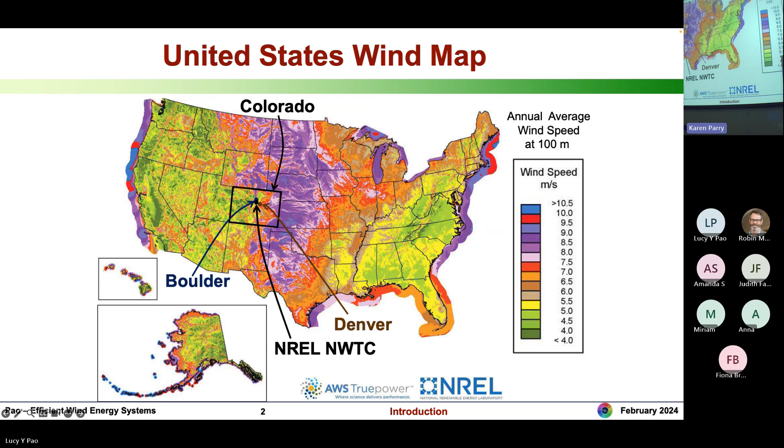What I thought I would do is first talk about where we are now in terms of installed wind power capacity worldwide, and then talk about a couple of projects, hopefully areas that can help wind energy develop further in coming years. My group has been involved in investigating 2-bladed and 3-bladed lightweight downwind turbines - I'll talk a little bit about that project. I'll also talk about floating wind turbines, the project that we've worked on there.

First, where are we now? So we're going to look at this decade from 2013 through 2022. Over this decade, worldwide, the average annual growth rate for installed wind power capacity is 12% per year. So at the end of 2022, there was 906 gigawatts of installed wind power worldwide.

Now, by country, which country has the most installed wind power? China, definitely, by far - China has about 40% of the world's installed wind power capacity. Now, what country is number two? It's not UK, it's not Germany - it's actually US.

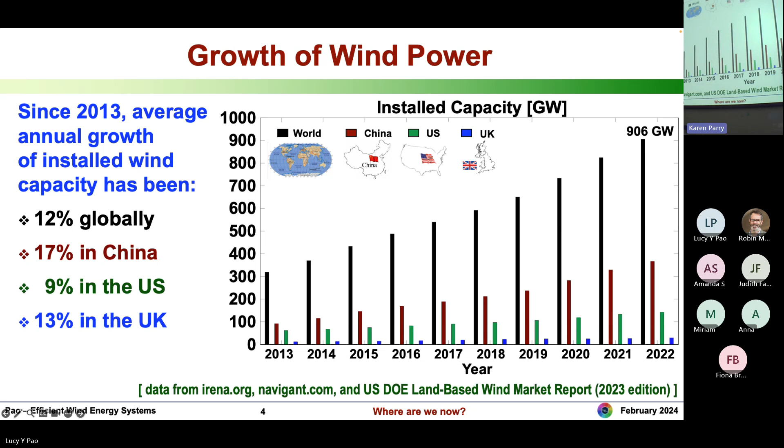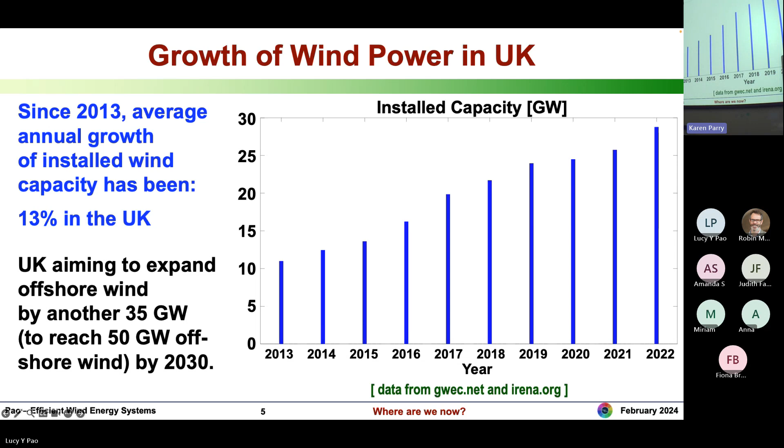This pie chart shows the top 10 countries in terms of installed wind power capacity, and there's quite a bit of installed wind power capacity in many other countries worldwide.

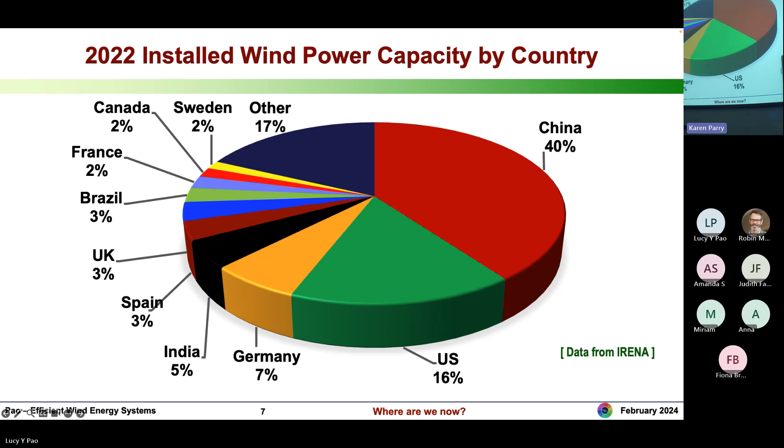Now, if you're a small country, comparing by wind power capacity maybe isn't so fair, so comparing by wind penetration might be a better measure. Wind penetration is what percent of a country's electrical energy needs is met by wind. In this regard, Denmark is by far the number 1 country—more than half of Denmark's electrical energy needs is met by wind. These are averages across 2022, and instantaneously, Denmark does at times reach 100% wind penetration, at which times they're trying to export a lot of that wind power to neighboring countries that can better use it.

China, for all its installed wind power capacity and very large population and electrical energy demand, is only at 9% wind energy penetration. The US has lower population, but unfortunately we're energy hogs, so we're only at 10% wind energy penetration.

The UK in 2022 is about 25% wind penetration—I understand it's about maybe 32% now. But the point is there's still a lot of room to grow. Solar penetration in general is behind wind penetration; it's catching up quickly and will surpass wind soon, but there's still a long way to go to get to 100% clean energy penetration.

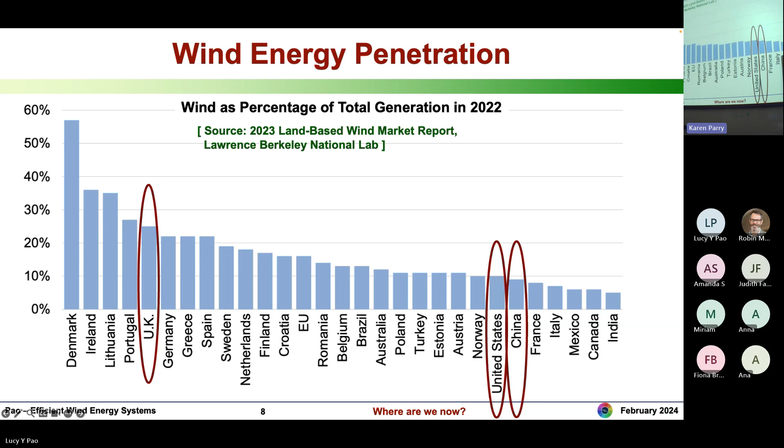So what are some of the things we've been studying in my group to hopefully push wind energy further? One area is looking at lightweight downwind rotors. Another area we've been looking at is floating wind. Let's first talk about the downwind lightweight rotor concept.

But before getting into that, let me briefly go over the main components of a wind turbine so we're all on the same page. This is a photograph of a 1.5 megawatt wind turbine at the NREL site just south of my campus—a traditional 3-bladed upwind turbine. The wind comes in from the left. There are 3 blades that come together at what's known as the hub. The hub together with the 3 blades is called the rotor, which is the rotational part of the turbine.

The rotor is mounted to the nacelle. The nacelle also houses the drivetrain and generator, and sits on top of the tower, which is secured into a foundation—for land-based turbines, a lot of concrete, meters deep and these days tens of meters across. I brought in a plastic model of the turbine just for fun, which we can pass around.

So the standard wind turbine is a three-bladed upwind turbine that faces into the wind, so the wind comes through the rotor first before going around the tower. If we turn it the other way, then it's a downwind rotor—the wind will go around the tower first before going through the rotor.

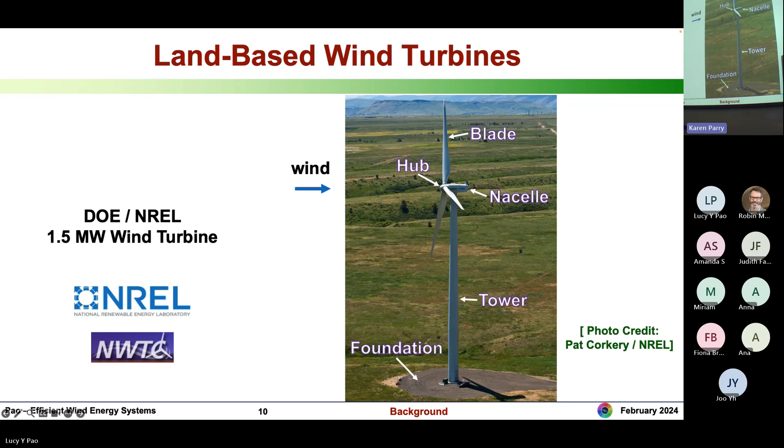Many people are familiar with wind turbines just getting larger and larger. Over the last 30 or so years, wind turbines have gone from about 100 feet at hub height with 90-foot rotor diameters, to now well above 300 feet at hub height and beyond 500 feet rotor diameters.

Now, for land-based turbines, we don't see more than about 5 or 6 megawatt turbines, largely due to transportation constraints on land—roads and railways really don't allow towers and blades for larger turbines to be transported. So the really large turbines are all for offshore wind.

For offshore wind, there are 13 megawatt and 14 megawatt turbines being built in large wind farms that are going to become operational this year.

There are 15 megawatt commercial wind turbines that you can order now. They will be ordered for newer wind farms that are being planned. And so we will get to the 17 megawatt turbine, I think, well before 2035 commercially.

When we see wind turbines, especially these large offshore turbines, typically we're looking at them from a distance, so it's sometimes hard to appreciate just how large they are. There's the silhouette of the Statue of Liberty, but in case you're not as familiar with that, I've also included an Airbus A380.

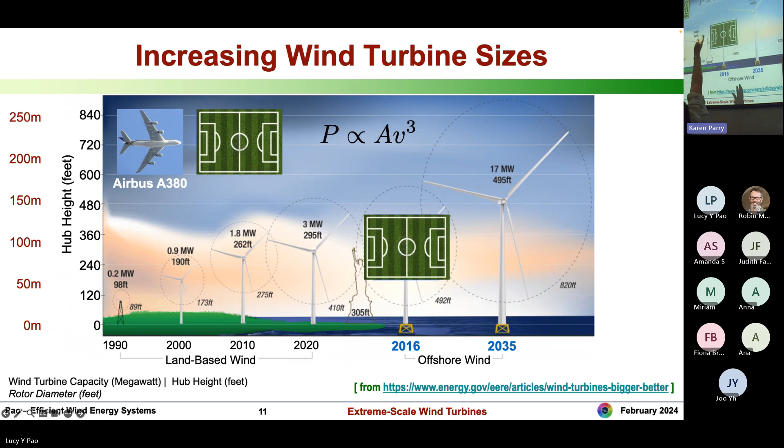Remember, we have 13, 14 megawatt turbines that are being built in large wind farms as we speak. So part of the economy of scale in going to larger wind turbines is that power is proportional to the cube of wind speed, and there's typically higher speeds as you get higher off the ground. Having taller towers allows us to access those higher speeds. Power is also proportional to the rotor swept area, and taller towers can also hold up much larger rotors.

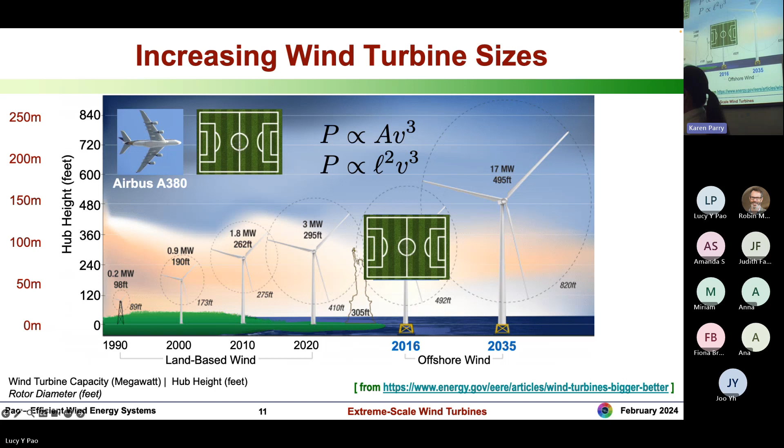The rotor swept area is proportional to the square of the length of the blades. So you really have, as you get to these larger turbines, this tremendous growth in the power that can be produced. That's one of the economies of scale that happens.

One of the projects that my team has been involved in is this project where we're exploring lightweight downwind rotors. We called our concept the segmented ultralight morphing rotor, or SUMR for short. I'll explain the terminology a little more in the next slide.

We're bio-inspired by palm trees, which are down here in the lower left. Palm trees on average are about 20 meters tall, so much smaller than everything else here. In this project, we designed a number of 13 megawatt, 25 megawatt, and 50 megawatt turbines. At the start of our project in 2016, the average land-based turbine was about 2.5 megawatts. Nowadays, the average land-based turbine is about 3.5 megawatts.

All of our 13 megawatt designs had blades longer than 100 meters, and all of our 50 megawatt designs had blades longer than 200 meters, so the rotor diameter is more than 400 meters. These are really, really large machines.

So why downwind? Well, when you have upwind turbines, the rotor is in front of the tower, so wind is coming through the rotor before going around the tower. The combination of centrifugal, gravitational, and thrust forces on average pushes the blades backwards. And as these blades get longer, they naturally get a little more flexible, and they're being pushed back more towards the tower.

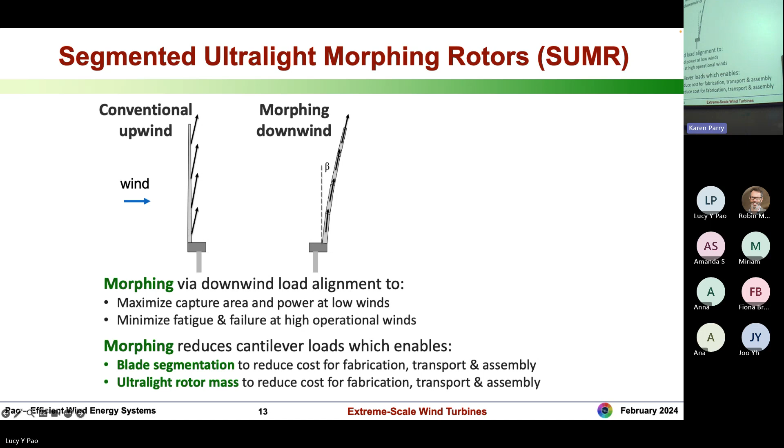So the idea is then you have these downwind, lightweight blades. They will naturally morph with the wind. When you have very light winds, the blades will be pretty much wide open, trying to maximize power production. As wind speeds increase, they'll morph with the wind and essentially try to align with the wind instead of fighting it. That will reduce the structural loads inside the blades and also will naturally regulate the power at those higher wind speeds. We're bio-inspired by palm trees, which do just that.

They morph with the wind, they're lightweight, they can survive these hurricane conditions, which is something of concern on the US East Coast in particular. This is in contrast here — this is an actual photo from a hurricane.

In the foreground here, there is a massive oak tree, which has actually been toppled over by the hurricane forces. That massive oak tree essentially is trying to be as rigid and massive as possible, fighting against the wind, but in the end, it got toppled over, whereas the palm trees, going with the flow, were able to survive the hurricane conditions. So that's kind of the inspiration for our SUMR design.

Now, one other aspect, the segmented part, is an aspect that our structural colleagues were investigating. Blades, for the most part, are manufactured in one piece these days. So as you get to these 100+ meter blades, it's very complicated to transport them. There are a number of teams investigating whether it might make sense to manufacture blades in segments. That certainly would simplify the transportation issues. But the big question is, when you get to the site and put them all back together, will that blade have the structural integrity to last the 20 or plus years that we want these blades to last? That's still the big question.

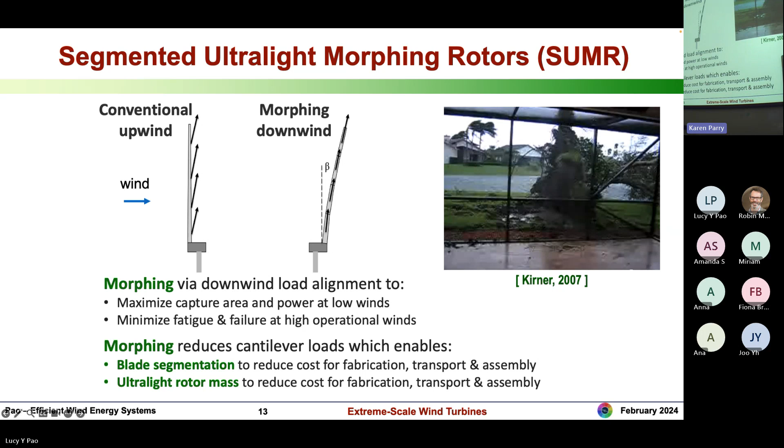Okay, so I'm not going to talk more about the segmentation part. That's not something that we in my group have directly worked on, but it is an active area of research.

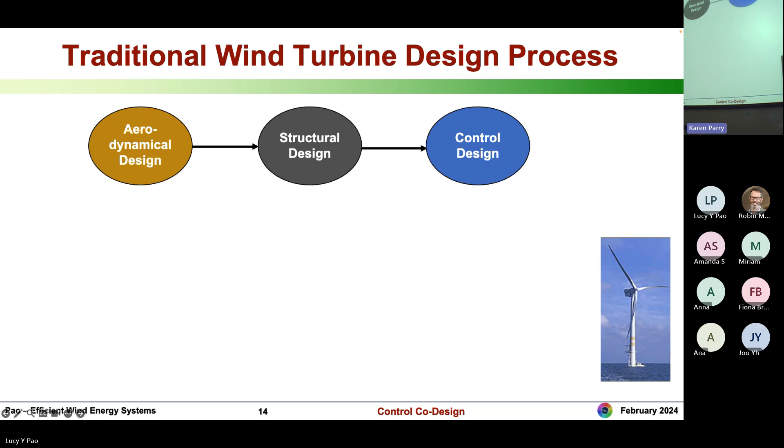Now, in designing these downwind turbines, we went through the entire wind turbine design process, which traditionally is pretty sequential, where the aerodynamical design is done first, followed by the structural design, followed by the control design. My research group has expertise in the control systems aspects, so we are focused on the control design. Usually by the time we're asked to design controllers for a wind turbine, the entire wind turbine has already been designed, and we're just asked to design the best controllers to try to maximize power production or regulate power production and reduce structural loads.

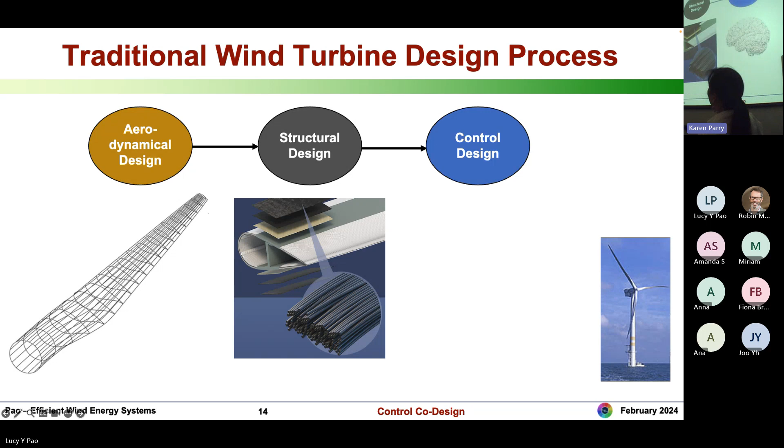So just to give a little more detail, the aerodynamical design is concerned with the geometry of the wind turbine — what is the shape of the blades. The structural experts then determine the material layup needed, down to the detail of the orientation of the fibers. They want to ensure that the blades, for instance, will last the 20+ years of the lifetime of the wind turbine. Now, we'd like to think of the control system as the brains of the wind turbine system.

The control system is making use of the measurements from sensors monitoring the wind turbine, and based on those sensor measurements, deciding, do we need to pitch the blades more? Do we need to yaw the turbine in order to maximize power production or reduce structural loads?

Now, when you have a sequential design process, there's some conservatism at each step. For instance, the structural designers might end up putting more material into the blades to make sure that blade will last the 20+ years. They're not quite sure how well the control system is going to work, so just to be safe, they put more material into the blades.

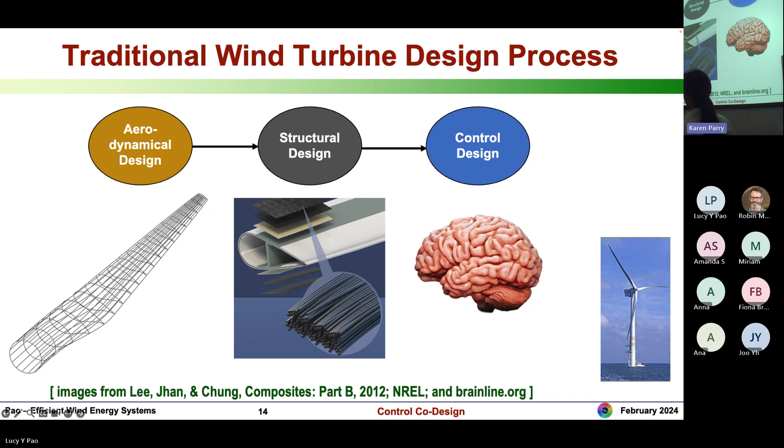And so what we ended up doing in this project — we initially used that sequential design process, but then we had some really aggressive milestones that we needed to meet, and we ended up backing into what we call a control co-design process, because we found that the sequential process was not going to allow us to meet our milestones. So we ended up working more like this, where we would pass back intermediate control algorithms to the other teams for them to use. For instance, the structural team found that our controllers would mitigate the vibrations really well, so they didn't need all that material in the blades. They could actually remove more material from various portions of the blades to reduce the capital cost.

Ultimately, through this control co-design process, we were aiming to minimize the levelized cost of wind energy. Through this co-design process, we were actually able to achieve a 25% reduction in the cost of wind energy in a lightweight two-bladed downwind rotor wind turbine, relative to a traditional three-bladed upwind turbine at that same 13 megawatt scale. So this was pretty exciting, and we're actually still continuing to use control co-design in a number of ongoing projects.

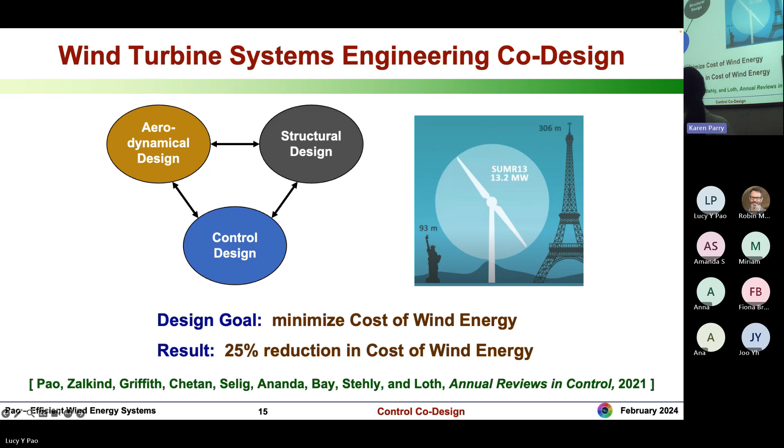So in order to fully demonstrate the lightweight downwind rotor concept, we also did field testing.

So one of the 13 megawatt designs that we had, we gravity aero-elastically scaled down to 20% scale. The original 13 megawatt turbine had 105 meter blades, and then we scaled down. So we had 21 meter blades that were actually manufactured and first ground tested, and then ultimately hoisted onto a research turbine at NREL.

And we ran through an entire measurement campaign that lasted about 10 months, from 2019 through the summer of 2020. So I have two videos here.

This first video is nominally of the wind turbine in a parked position, but when there are winds, you'll still see it rotate. The point of this video is to show just how flexible the blades are. So as the rotor's spinning a little bit here, if you look closely, you'll see the blades flexing. These are really pretty flexible blades.

Then the next video shows the wind turbine in operation. It's downwind, relative to the nearby three-bladed upwind turbines. You can see that downwind coning, and through all the field testing, we were able to demonstrate that downwind load alignment and low structural loads. So the field testing was quite successful. We tested out that load alignment, low structural load concept.

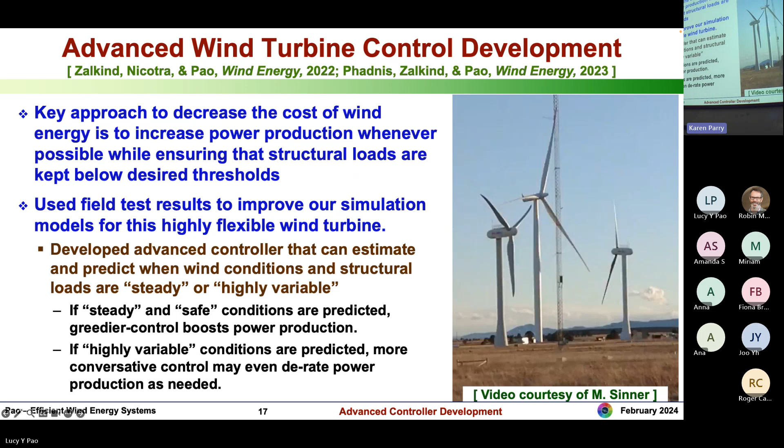Now, we were racing to develop this controller, but we were not able to test it on the field turbine. It's really expensive to maintain the field turbine, so ultimately it had to be taken down, and we didn't have time to actually test this controller on that turbine.

However, as part of my sabbatical last semester, I was in Germany spending time at the ForWind Center for Wind Energy Research at Oldenburg University, and in discussions with them, they're interested in us testing this advanced controller in their wind tunnel facility. They've been gearing up for this test.

My PhD student, Mandar Phadnis, joined me out there in November. We've been gearing up for the test. I handed off everything I had to him, and he's actually still there. He'll be there till early April, and our wind tunnel window is coming up in a couple weeks, so we'll actually be testing.

So this is the ForWind building. The wind tunnel is on this right-hand side, and now we're testing in the wind tunnel facility.

Yeah, Jack, do you have a question? Oh sure, Robin, can you ask questions? I'm not sure what's the etiquette. If it's for clarification, yeah, I'm fine. No, it's what you're having for dinner, maybe not.

May I ask to what extent the control design is limited by kind of longevity concerns? Sometimes in these applications, we'd like to use a more active controller, but we just wear out the actuator too much. Is that a concern? That is a concern, yes.

And when we talk with industry, they are definitely very concerned. Often they ask the question, we're doing so much better in the controls, but how much are we pitching? They want to know how much actuator usage we are using. And so there is that trade-off. So we are often penalizing actuator usage so that we only use it when it's really providing a big benefit. Yeah, that's a great question. All right.

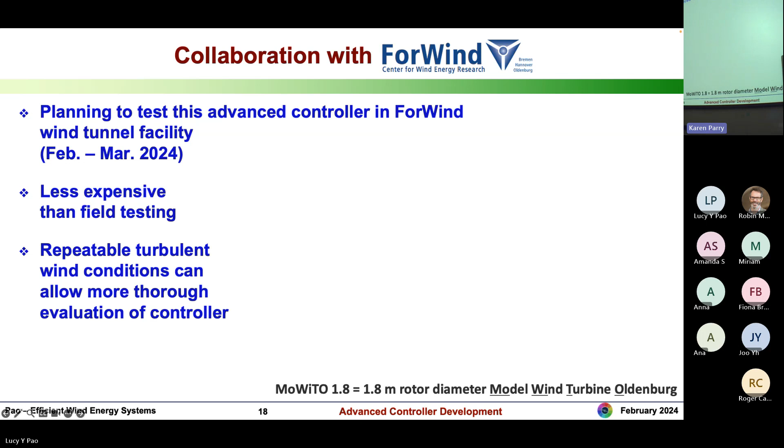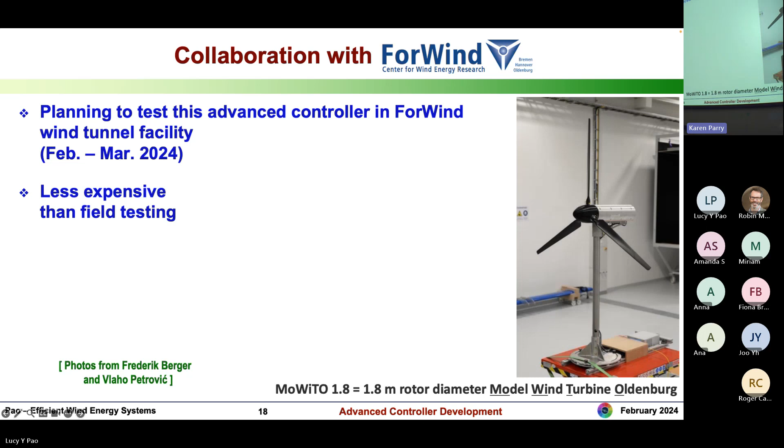So testing in the wind tunnel is not inexpensive, but certainly less expensive than doing the open field testing we were doing at NREL. The other big advantage there is that at this facility, they have this controllable grid that they can place in front of the inlet where the wind comes into the tunnel, and they can essentially control the turbulence that's coming in, and they can reproduce relatively accurately turbulence that's in the field.

Okay, so we're doing our testing then on these 1.8 meter rotor diameter model turbines. They're called MoWiTO for model wind turbine Oldenburg, and these model turbines have all the sensing and actuation capabilities that we need for testing of the advanced controllers. And so the nice thing in testing in the wind tunnel is we can repeat realistic turbulence conditions and evaluate industry standard controller versus advanced controller, and really evaluate the advantages or disadvantages of different approaches.

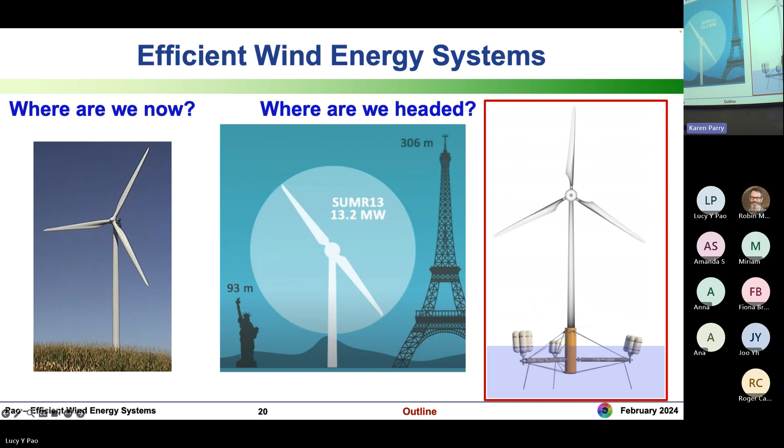Any other questions? Okay. All right, so now turning to offshore wind. I'll talk about floating offshore wind, but first in general, why are we interested in offshore wind? In the US so far, we have very little offshore wind, but there's still reason to have interest in offshore wind, and some of these reasons are similar across many countries. Generally, offshore you have stronger, more consistent winds. Oftentimes you have large cities on the coast, so it makes sense to generate electrical power near where it's needed. And as mentioned earlier, once we go offshore, there are few constraints on turbine size, so we can go to much larger turbine sizes to drive down the cost of energy.

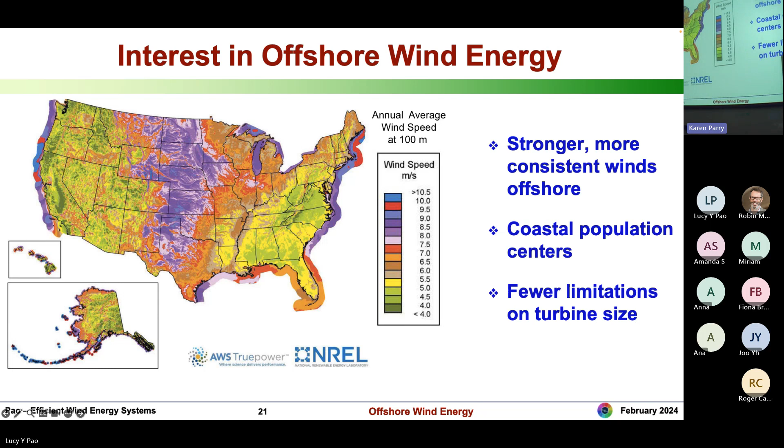All right, now let's look at the growth of offshore wind power. So earlier we were looking at the growth of all power, land and offshore. And so to recap, at the end of 2022, there's 906 gigawatts of wind power globally. Average annual growth rate over the last decade was 12%. So looking at offshore wind only, the average annual growth rate is almost 3 times faster at about 33% per year. So at the end of 2022, there was 59 gigawatts of offshore wind.

If you take that 59 divided by 906, that was 7% of all wind. And so it's still a pretty small percent of all wind, but it is expected that offshore wind will continue to grow much faster than land-based wind. And so it's expected that offshore wind will become a significant fraction of overall wind.

Now, in terms of country, which country has the most offshore wind? UK was number one. It's China. Yeah. So China has had this tremendous growth rate. And if you move this over, you can see that. You're hiding it. So what country is number 2? It is the UK. So UK was number 1 until this year. There, you can see that huge growth in Chinese offshore installations. What country is number 3? Actually, Germany. Yeah.

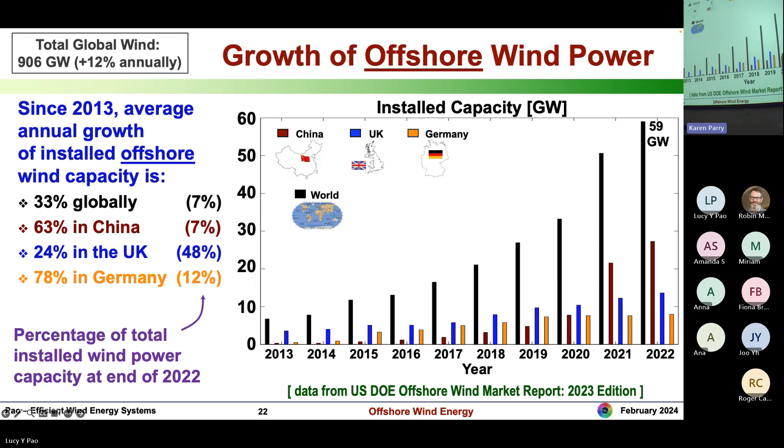And so now, how much of each country's installed wind power is offshore? It's going to vary a lot depending on the amount of coastline, amount of offshore wind resource. So the UK, half of overall wind power is offshore. Relatively small country, great offshore wind resource. All right.

Now, right now, offshore wind is dominated by these 7 countries. And there's not much offshore wind elsewhere in the world. But that's changing. There's a lot of upcoming offshore wind projects that are being built in a number of other regions around the world. And so I think over the next few years, we'll see more countries on this pie chart.

Okay. I was just wondering, what do the percentages mean exactly? Because I'm from Belgium and I see Belgium 4%. So this is like China has 46% of the offshore wind power installed worldwide? Worldwide. Yeah, yeah. Belgium has 4%. Yeah, which is also very impressive, right? It's a small country. Yeah, exactly. Okay.

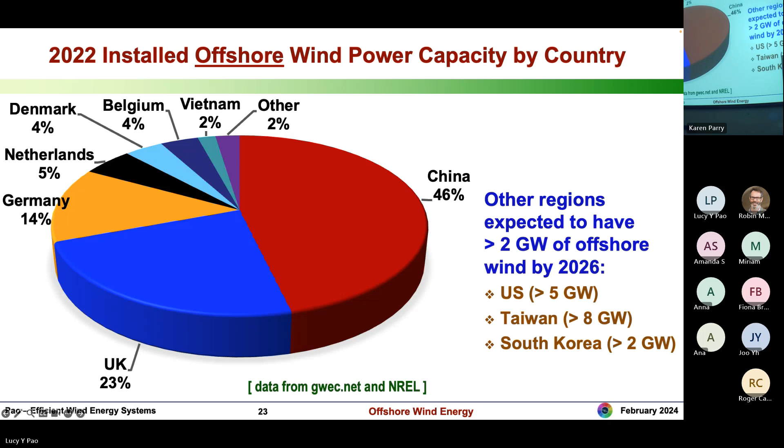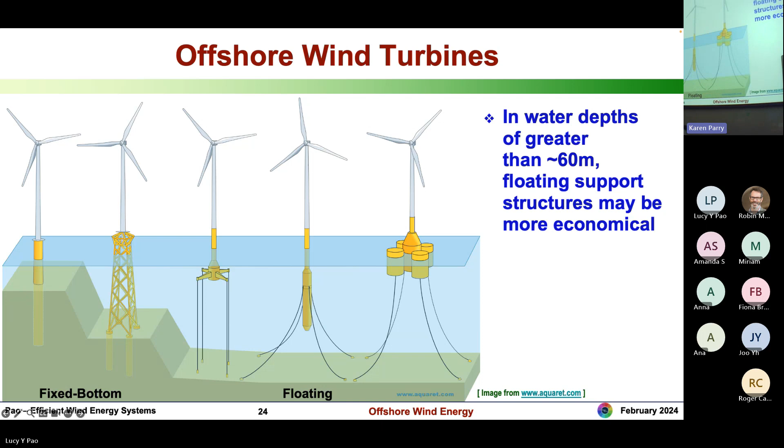All right. So more than 99% of offshore wind turbines right now are what are called fixed bottom offshore wind turbines. These are where the turbines are built all the way down into the sea floor. Now, when you get into deeper waters, roughly 60 meters deep is considered kind of that dividing line. Once you get deeper than that, it doesn't really make economical sense to build those wind turbines all the way down into the ocean floor. And so floating platforms have been considered, and looking at floating wind turbines. So once you have floating wind turbines, both the wind and waves will affect the wind turbine motion. You'll have oscillations, and the control problem actually becomes more challenging.

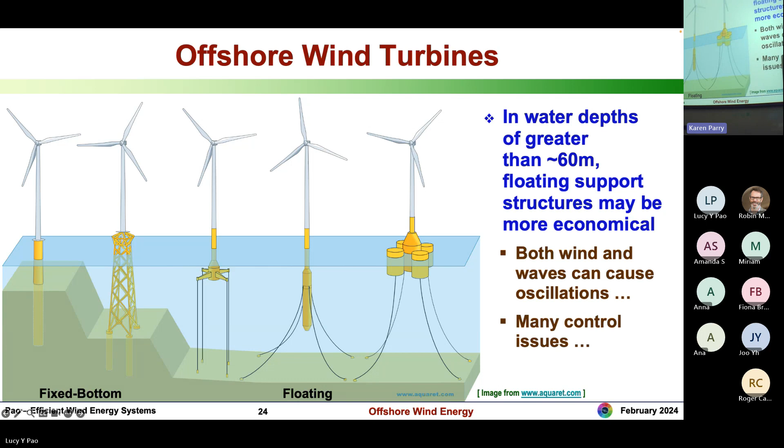So right now, there are about 200 megawatts of installed floating wind power, primarily all in Europe. So there's Hywind Scotland, there's WindFloat Atlantic off the coast of Portugal. There's Kincardine off of Scotland, and there's Hywind Tampen off the coast of Norway. And so all of those are relatively small floating wind farms. They amount in total to 193 megawatts.

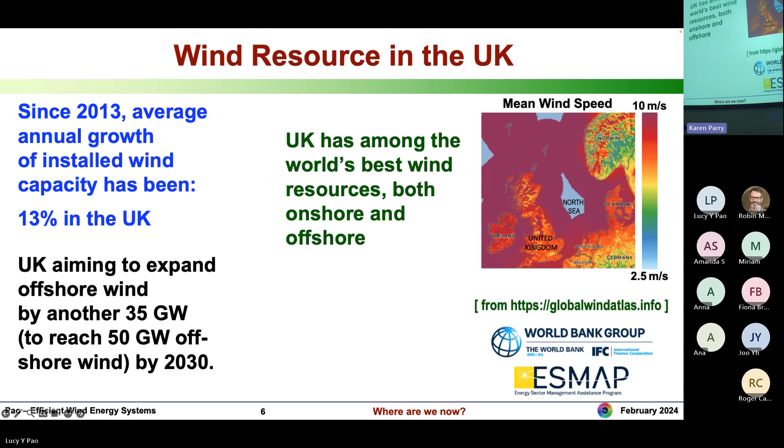Typically, how far away would the fixed bottom and the floating turbines be from the shore? Like, would they be very visible? So typically the floating will be further away. I think of the 4 small floating wind farms, 3 of them are about 20 to 30 kilometers offshore. The latest one that went into operation, Hywind Tampen, is something like 140 kilometers offshore. Pretty far. Yeah, and it's in 200 to 300 meter deep water. So it's really deep. Yeah.

Okay, does that answer your question? Yeah, I was just saying, because I read something about how they were potentially putting these offshore turbines in Cape Cod, but then people were saying that it would impact tourism because it doesn't look nice. Yeah. I think for the most part those are actually the shallow water sites.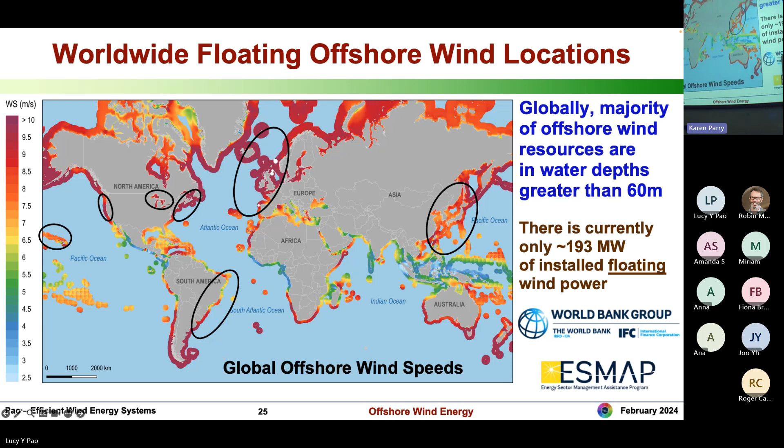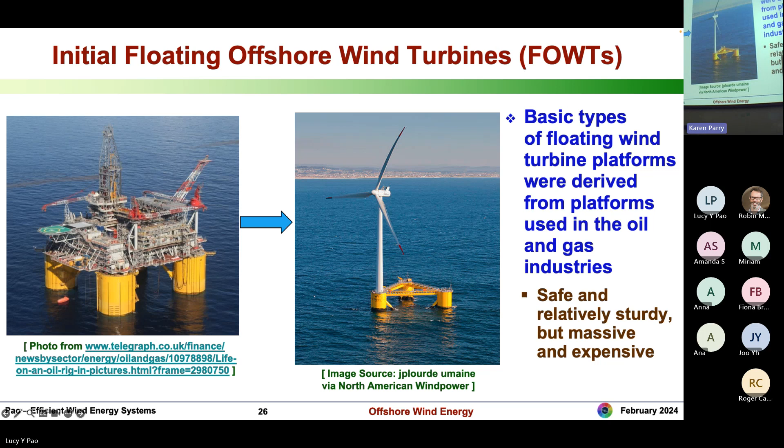All right, so some of the initial floating platforms that have been considered have been essentially borrowed from the oil and gas industry. So these end up being really massive structures. That means a lot of capital costs, a lot of material needs to go into these structures. But the flip side is they are actually relatively sturdy, so you don't get too much motion rocking them. So there's a lot of drive to reduce that capital cost, to reduce the cost of those floating platforms. So we'll get to talking more about that.

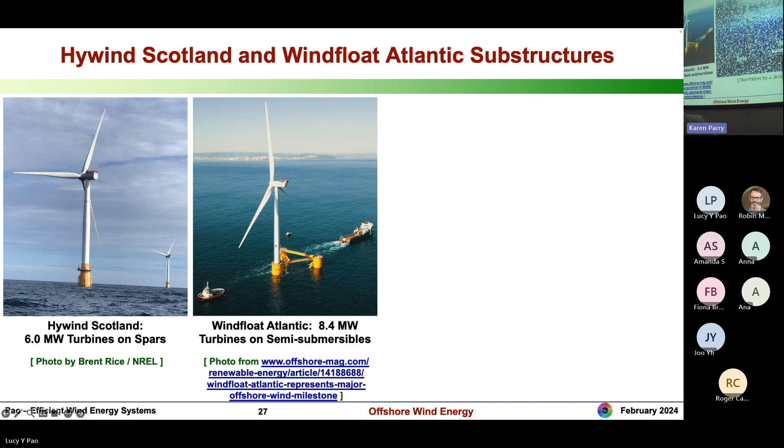So let's look at the two main types of floating platforms that have been used. Of the 4 small floating offshore wind farms that exist right now, 2 use what are known as spar platforms, and 2 use what are known as semi-submersible platforms. These are actual photographs of these platforms. You can't quite see into the water there, so I'm going to use this illustration to explain how these work. So the spar platform achieves stability by having a really deep draft.

But the downside of that is that most ports are not deep enough, and so you can't assemble these turbines at port. So you have to transport the components out to essentially where those wind turbines will go, and then do the assembly out in that open water. So that adds some complexity.

Now, the semi-submersible, on the other hand, achieves stability by distributing buoyancy across a much wider plane. It has a shallower draft, and that then enables these semi-submersible floating turbines to often be assembled at port. And then they can actually be towed out to where they need to be by a regular tugboat. So that's what was done in the WindFloat Atlantic project, and that's a really huge advantage for semi-submersibles.

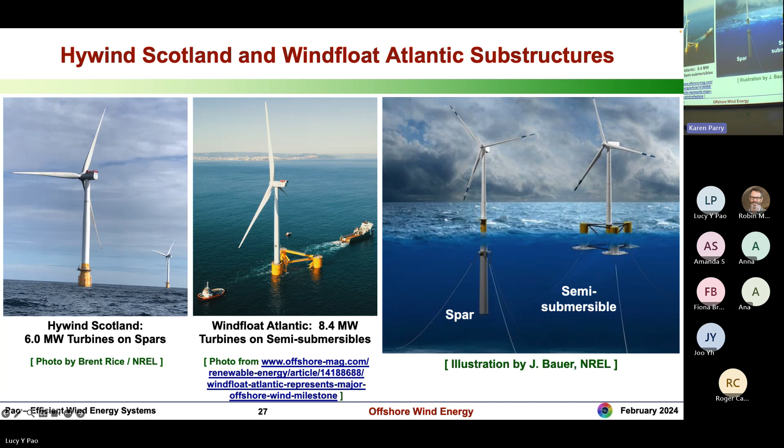And if you look at the pipeline of floating offshore wind farms that have been announced and where they specify the likely floating platform technology they'll use, semi-submersible is the most popular. The downside of the semi-submersible platform is because it has this wider plane, it has more of that platform above the water line, and it's then more exposed to wave impacts. And so that then has to be handled carefully.

So one of the projects that we've gotten involved in over the last few years is this USFLOWT project. USFLOWT stands for Ultra Flexible Smart Floating Offshore Wind Turbine. Essentially, it consists of a DTU, Danish Technical University, 10 megawatt reference wind turbine on top of a novel lightweight substructure, which we call the SpiderFLOAT. So when we refer to SpiderFLOAT, we're referring to the lightweight platform, and when we refer to USFLOWT, we're referring to the entire floating wind turbine.

And so here we were doing control co-design between the structural design of the floating platform and the wind turbine controls. Basically, our teammates, the structural experts, were trying to decrease the cost of the SpiderFLOAT platform, and that largely meant decreasing the mass of the SpiderFLOAT platform. And then our job on the control side was to make sure the controllers still stabilized that floating wind turbine. And so there was a lot of back and forth in terms of how much mass they could remove.

Question: it's definitely more complex to install an offshore wind turbine than an average wind turbine. But I was wondering, why should we promote offshore wind turbines instead of a wind farm or normal wind turbine, compared to land-based? Does the offshore wind turbine provide more efficient energy, or is there some other great advantage?

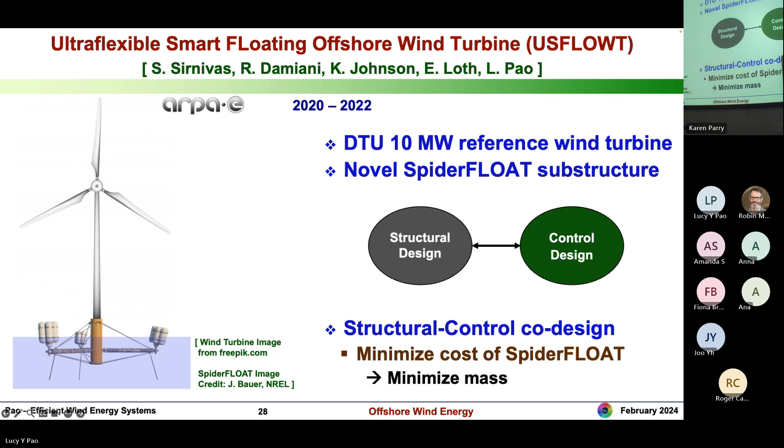All right, so this is a video showing our USFLOWT configuration in action. The USFLOWT—you can see it's kind of semi-submersible inspired, but trying to remove mass where possible. It's designed to be modular for ease of manufacturing.

Essentially there are multiple legs, with cables that attach to the legs, and buoyancy can clusters that are attached through universal joints to the legs as well. One of the big advantages of these buoyancy cans, and part of the design, is to try to dissipate the waves before they impact the tower, mitigating wave impacts onto the tower and onto the turbine itself.

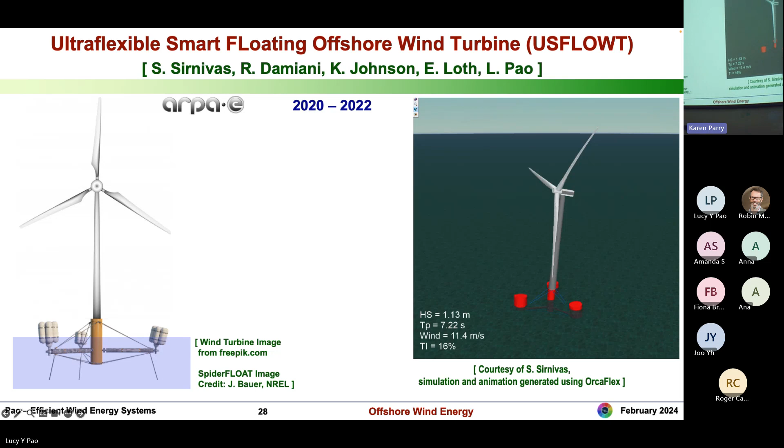So this USFLOWT project is now continuing into a phase 2, where we're actually going to be doing some water testing to really try to see how far we can push this technology.

All right, another new project that just launched is also a phase 2. We were involved in phase 1 of this, but now becoming more involved in phase 2. This is the Wind Energy with Integrated Servo Control, WEIS phase 2. The goal of this project is to develop an open source tool set to enable controls co-design for floating wind turbines.

And we had backed into co-design in that SUMR project—we were trying to meet our milestones, and we kind of backed into doing co-design. We came up with a scheme that seemed to work well. Now we're trying to take a step back and understand that co-design process better: what are the design coupling variables that we really need to include in that optimization process?

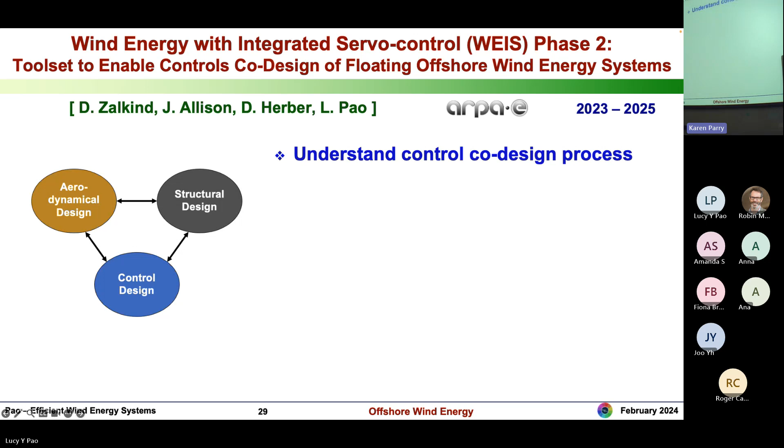Something else we are also trying to do is automate, to the extent possible, the controller tuning process. The other thing we found out through the SUMR process is that we had many downwind turbine designs—we went through probably 80 downwind turbine designs in all of that optimization.

We found out that the aero team could update the aero design much faster than we could tune even the most baseline controller. Same with the structures team—they could update their structural design faster than we could tune the control. So the other team members kept throwing wind turbine designs at us, and we couldn't keep up tuning even the most basic controller design. So my student and I were like, okay, we need to come up with a different approach here.

So we started looking at automating the controller design. There's still a lot of work to be done, but we released a reference open source controller that does some automation of baseline controllers. And that's actually had quite a bit of uptake around the world, which has been fantastic to see.

Non-controls experts are using it so that they don't need a controls team to tune their controllers, and they can evaluate different wind turbine designs from aero-structural points of view. It's also being used by controls teams to get to a baseline controller that serves as the reference point, so we can spend more time developing advanced controllers to really bring out what a novel wind turbine concept is aiming to do.

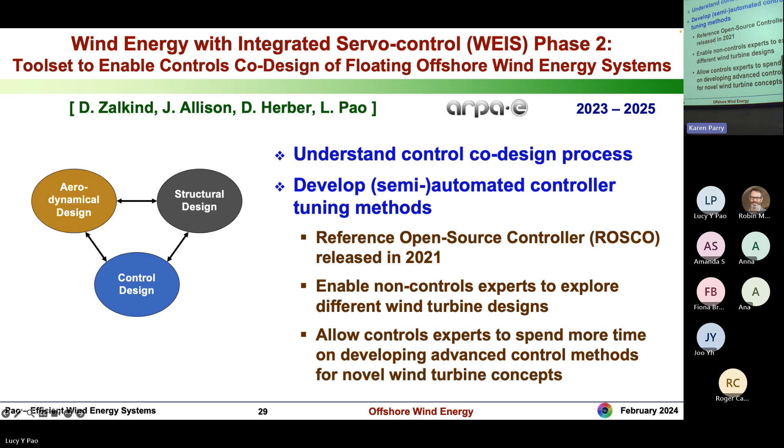So we're now continuing to develop—as we develop advanced controllers, we're always thinking, can we automate this? And so we're trying to automate some of the advanced pieces that we can develop as well.

So in summary, this aero-structural control co-design has really been a lot of fun. We've learned a lot by working closely with aerodynamicists and structural dynamicists, and this true overall co-design really does lead to more optimized wind turbine designs that can lead to lower costs of wind energy.

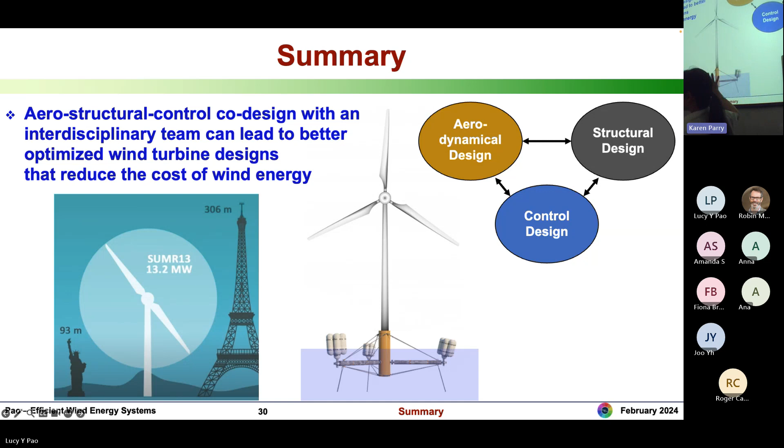So far with the floating wind turbine co-design, we've just done structural control co-design. We'd like to throw back in the aero part, because in our earlier project we were just using that reference turbine on top of this novel platform. That's what's been done for the most part for floating wind turbines—you take a standard fixed bottom turbine and put it on top of a floating platform. But if you know that wind turbine's going to go on a floating platform, are there things about that wind turbine that you might design a little bit differently? We'd like to do some investigation there through true co-design for floating wind turbines.

We believe floating wind is really just about to take off in terms of larger installation, really expected to grow rapidly over the next several decades. The cost of floating wind is expected to come down to about parity with fixed bottom wind energy. A number of groups are exploring ways to reduce the cost of that floating platform, and it does make the control more challenging.

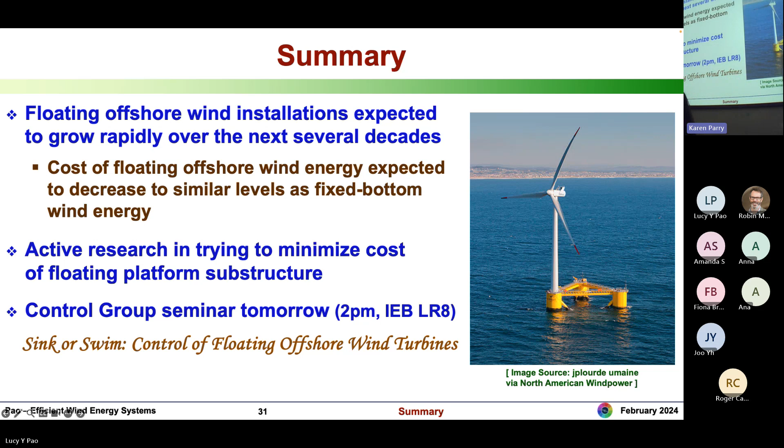In terms of ongoing and future work, I'd like to highlight just a little bit of thoughts on control at the wind farm level. Control of wind farms is actually a really active research area for land-based and fixed bottom wind farms. Usually what's done is each turbine is controlled to be as greedy as possible—each turbine tries to produce as much power as it can, and the hope is that across the wind farm that maximizes power production. But it's relatively agreed upon that that end result does not happen because there are these wake interactions.

This is a relatively famous picture now of a shallow water offshore wind farm off the coast of Denmark. When that lead row extracts power from the wind, you can see wakes generated behind—there are lower wind speeds in the wakes, more turbulent winds in the wakes. So these rear turbines can't produce as much power because of the lower wind speeds, and they also get beat up more structurally because of the higher turbulence.

There's been work done that shows that by coordinating the control of the individual wind turbines, taking into account these wake interactions, you can actually lead to much higher power production across the wind farm compared to each turbine taking a greedy approach. Now, for floating wind, there's some interesting questions. One is, how do the wakes propagate behind a floating turbine? The intuition is that since the floating turbine is moving, the wake behind it is going to dissipate faster.

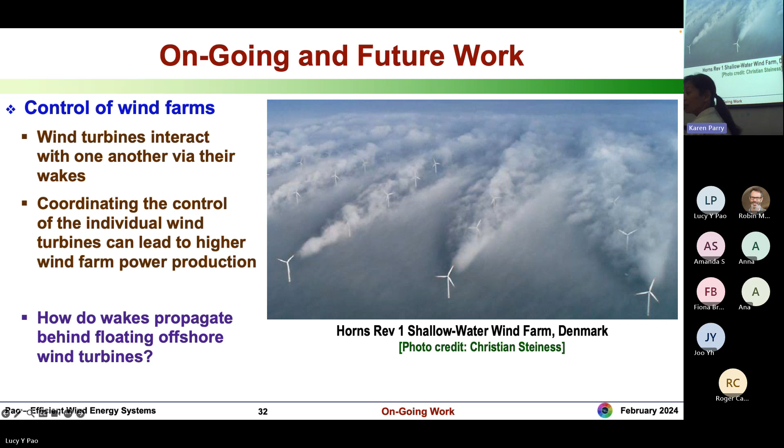There's some scientific results just coming up now from atmospheric and oceanic sciences researchers showing that wakes behind floating turbines dissipate faster, meaning less wake effects. That means for the same layout, a floating wind farm will be able to produce more power than a fixed bottom wind farm.

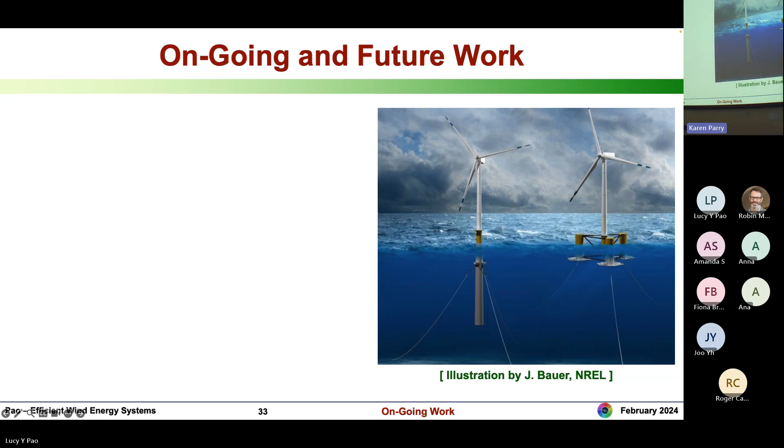Or you can pack more turbines into a floating wind farm. Another interesting aspect is that for floating turbines, mooring lines are relatively slack, so these floating wind turbines could be controlled to move a little bit laterally, allowing you to re-optimize the layout depending on current prevailing wind conditions, maximizing power production in a way you wouldn't be able to do with fixed bottom wind farms.

So there are a lot of promising directions to explore for floating wind farms.

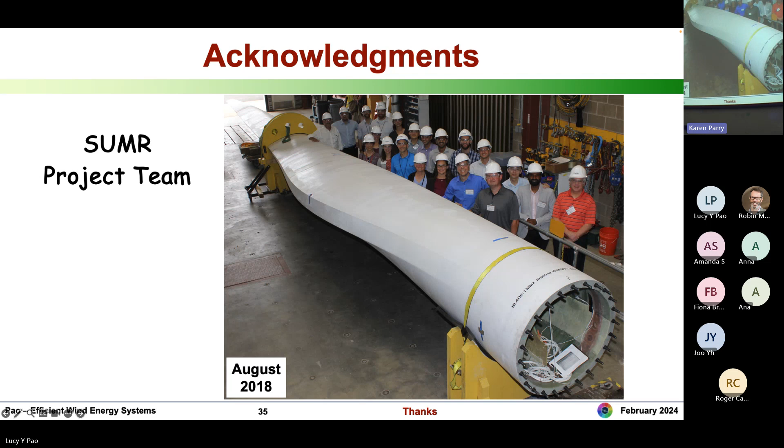I want to thank the SUMR project team. This is the team photo when one of our blades, the 21-meter blade, came in ready for ground testing. You can see it's a relatively large team, and we've learned so much from interacting with the aerodynamicists and structural dynamicists.